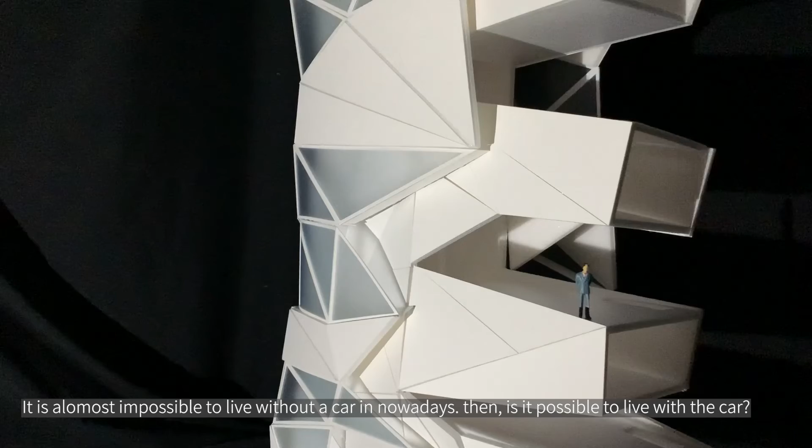Hello, I am Choi of Parking House Project. This is the index of the presentation. After the design process, I will show you the final model and its drawings.

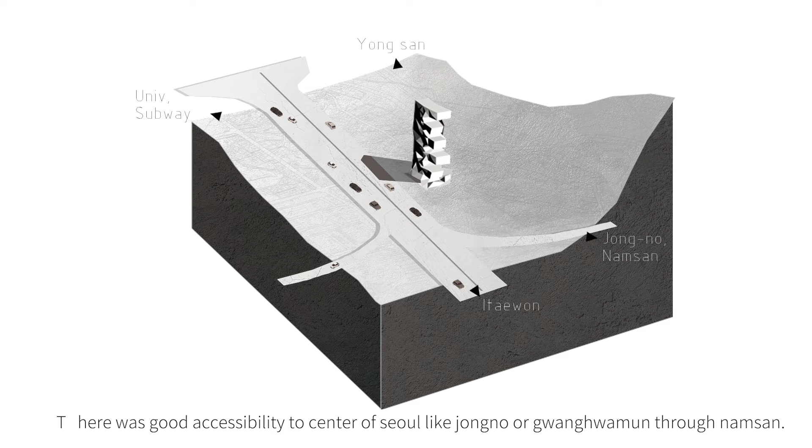First, the reason I designed the parking house inside this physical condition of Huam-dong: there was good accessibility to the center of Seoul, like Jongno or Gwanghwamun, through Namsan. In spite of this good location, they have a narrow, clogged road because of illegally parked cars, which declines trafficability of the site. So I want to activate this given road system by an infrastructure program.

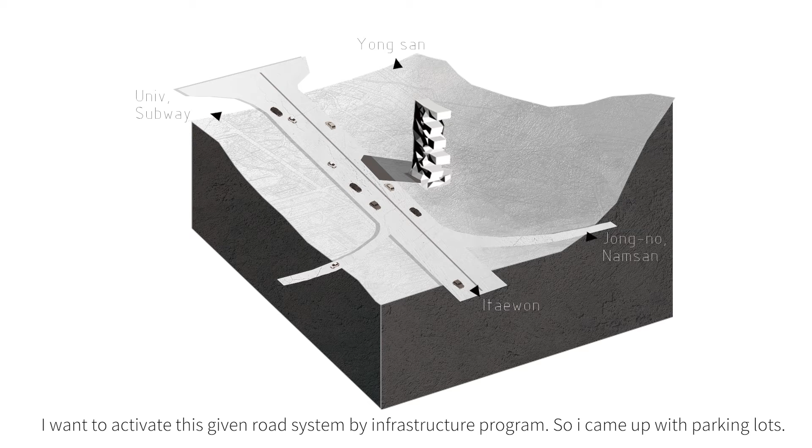So I came up with a parking lot. Next, I had to merge housing with parking, so I gave one lot for each five residents, and I made them live next to the parking zone by putting the entrance together. In this logic, I stacked five of them, and it provides one thin tower spontaneously.

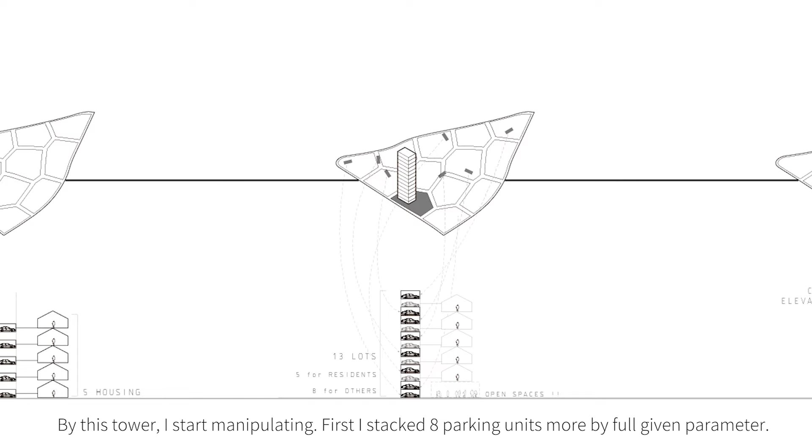By this tower, I start manipulating. First, I stacked eight parking units more by full given parameter. These surplus lots are for residents of other sites. And I floated housing from the ground to make huge open spaces for people.

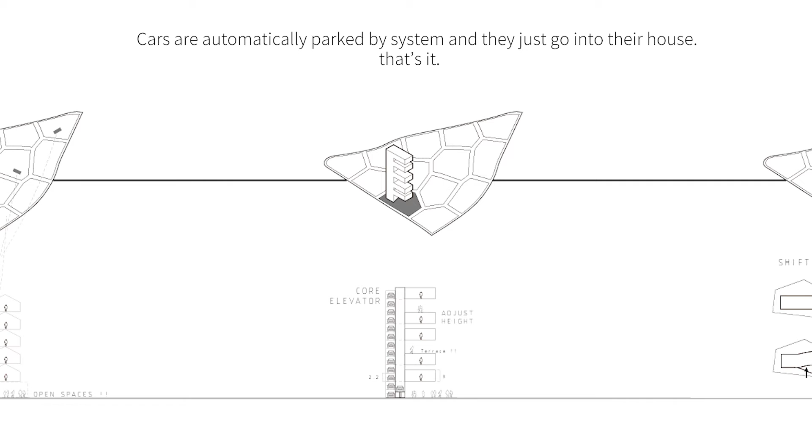Next, by setting the core elevator, I adjust the proper scale and entrances. People who live here come into the car lift with the car and go up together. Cars are automatically parked by the system, and they just go into their house.

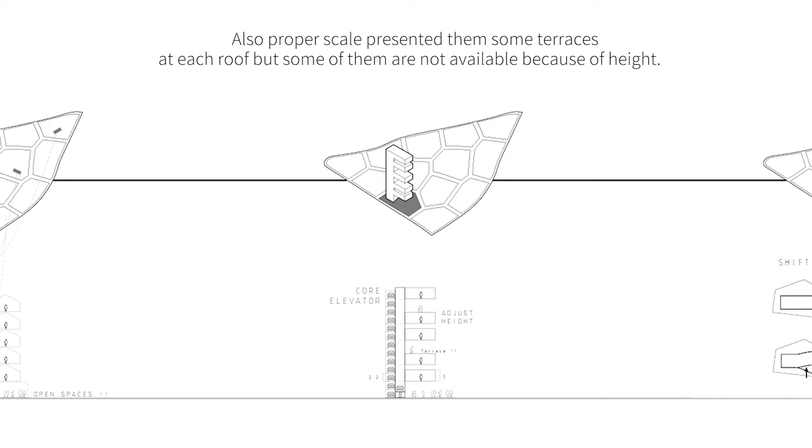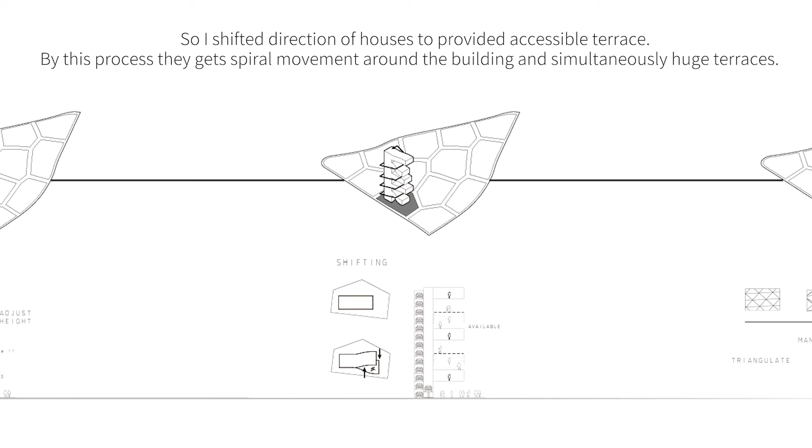That's it. Also, the proper scale presented some terraces at each roof, but some of them are not available because of height. So I shifted the direction of houses to provide accessible terraces. By this process, they get spiral movement around the building and simultaneously huge terraces.

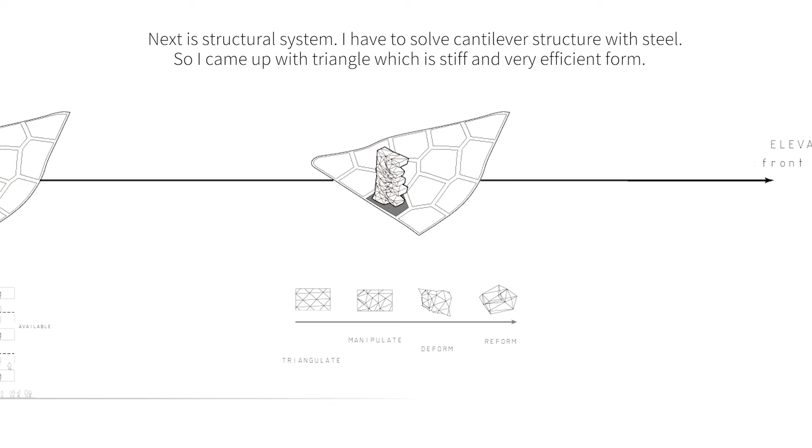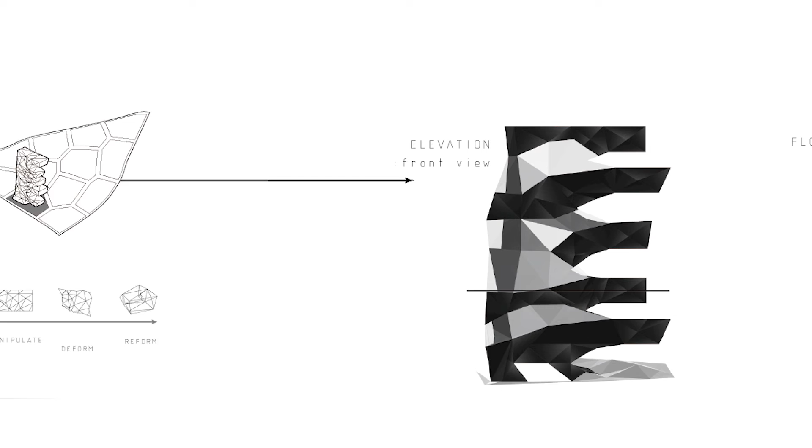Next is the structure system. I have to solve the cantilever structure with steel. So I came up with a triangle, which is a stiff and very efficient form. With this triangle pattern, I manipulated it to support weak points more, deformed it to shift, and reformed it to produce spaces. In this process, I finally came up with this building.

Let's get into more detail. This is the floor plan. As you can see, this house is for a single resident. And this is the section. I put all MEP shafts and the elevator into the core.

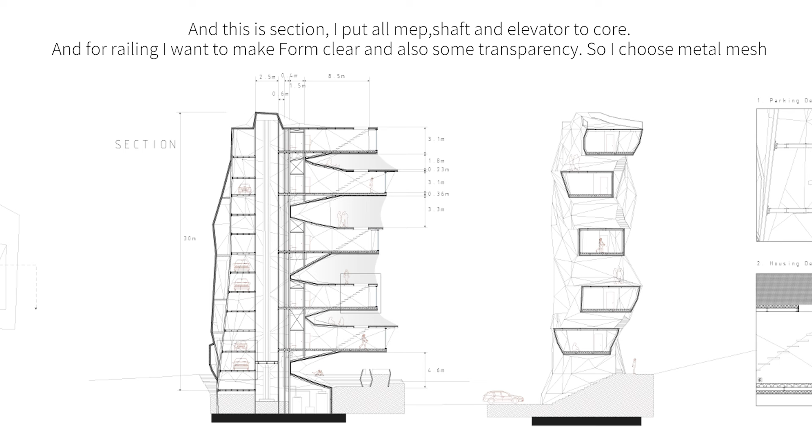For the railing, I want to make the form clear and also provide some transparency, so I chose metal mesh. This is a detail section. In the parking zone, they don't need a finishing concrete slab and insulation, but need more stiffness. In the housing, they need more materials, structure, and other things.

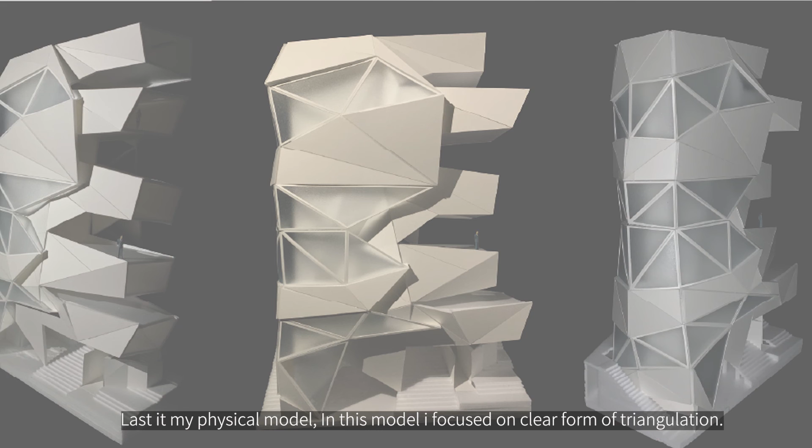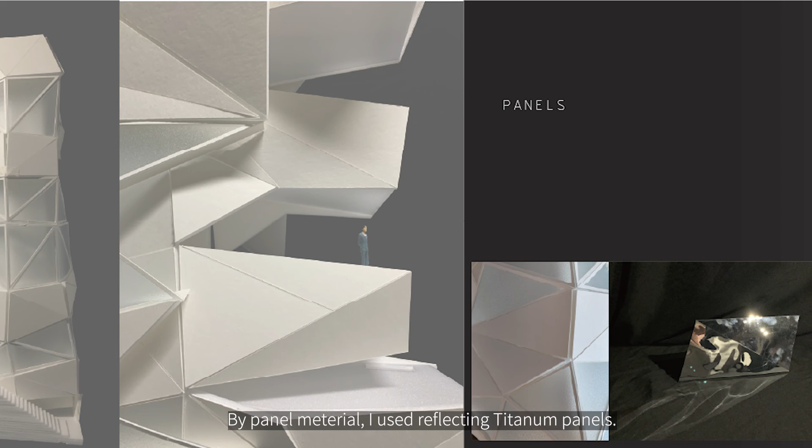Last is my physical model. In this model, I focus on the clear form of triangulation. Glasses in the hallway present transparency, making the building lighter. For the panel material, I used reflecting titanium panel. Thank you for listening to my project.